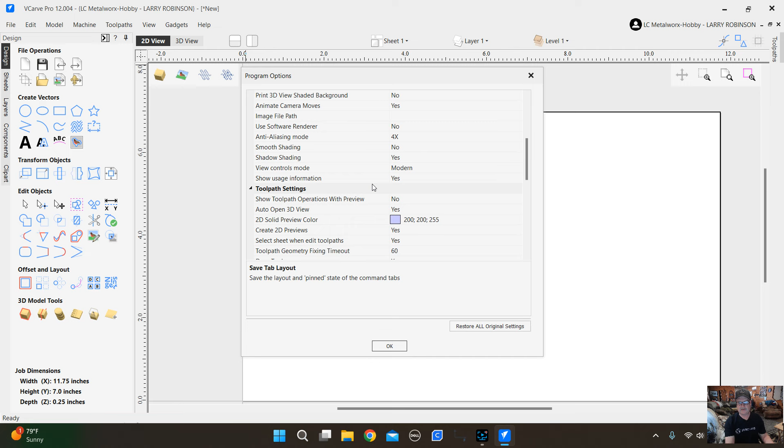All you have to do to fix that, I think you go up here to Edit, and you go to Options, and you have to go into these settings and click these general settings right here where it says 'show additional file operations'. You have to change that to yes. Right there, you click on that and see right here, you can push no or yes.

So that's all you do to get some of this stuff fixed. If something here don't look like you want it to, go into the options and look around in there.

But anyway, if I wanted to center this in here, all I need to do now is push this align button. See, under the transform objects, you can move things, set the size, rotate, mirror things, all that. But right over here it says align objects. Click that, and up here it's align to material. Hit the one that's in the center, right there. See there? So now that's perfectly centered.

What I was just going to show you is if this was an even number, you could do that when you put that in there. You could tell it exactly where you want it to be. But it's easy to align things like that also. And so to me that's not big enough, and we could have done that. So let's go undo. We don't really have to undo it. We can set the size right here if we want. So there's a lot of different ways to do things.

So as long as this says link XY, that's going to keep the proportions of everything. A lot of people want to hit the shift and drag things. I don't really like dragging stuff because once you do that, you can get things a little bit out of place, or you can deform it. But you can rotate, you can drag things. You do it if that's the way you want to do it. But I like to keep this linked if you want it to stay the shape it is. But you can change either one of these numbers.

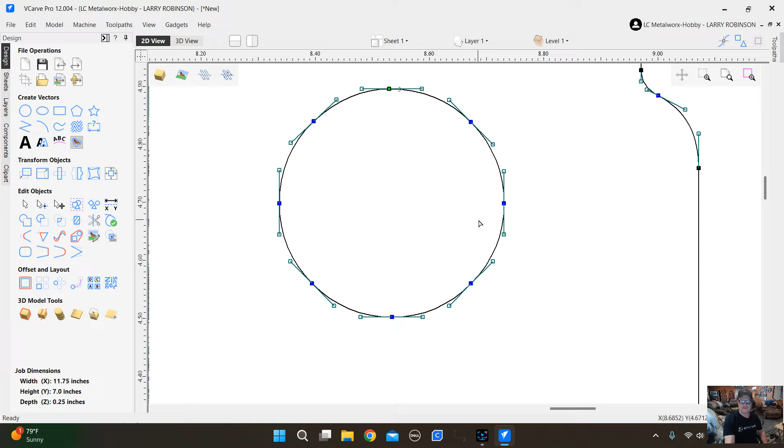Okay, and these are handles here. These are not separate nodes, so even the circle looks pretty decent. So I'll push the N again to get rid of that. And so now if you were worried about this, a lot of times people will group that, and right here it says ungroup and that says group. So you can group it and now it's back to all one piece. I don't normally do that, honestly, but you can. And it doesn't really hurt anything, I guess.

All right, now let's put something around this. So let's just get a rectangle. Right up here is where you can draw a rectangle. And you can tell it if you want that to be square corners or radius external or radius internal. I think we need a little of both. So let's do a radius external. And see, this is 11 inches. We want to use most of our wood. So let's go ahead and make it 11 inches. And if we want to radius the external just a little bit, let's put about a 1/4 inch.

I'll tell you what, this thing is lagging and it wasn't doing this to me earlier. I think it's because I'm doing the screen recording.

Let's go ahead and do a 1/4 radius on the corners. And we were going to make this, what did I say, 11 inches maybe? And the height of it, let's use up most of the height too. Let's go 6 inches. That'll give us a little bit of room there. Create that. Now notice I wasn't paying attention to my numbers. These were set for what I used last. So just push Control Z and that will undo your last move. And you can either put these numbers in here or just click this lower left corner and click, it'll snap right to that.

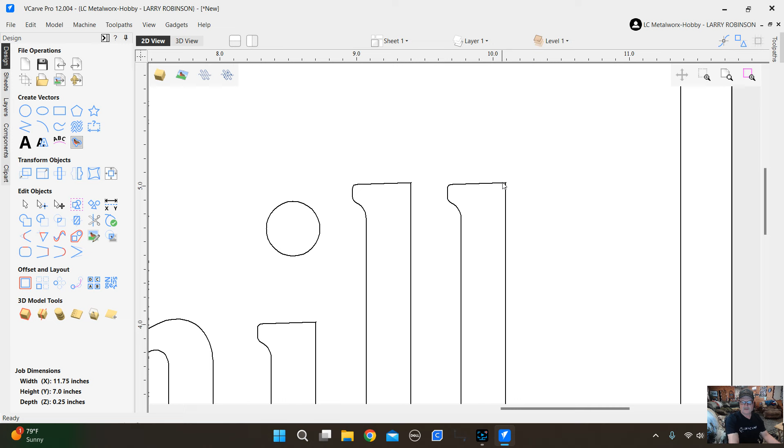And if you'll get close to that, you'll notice it has a check mark show up, and that's going to be an external radius just like that, and you can go around and click them all. Now if we'd have drawn this with that setting in there, it would have already been there when we made the rectangle. So you could do it either way if you forget, like I did. And you can also play with your different fonts and things too if you wanted to shape them different. Okay, we've got that to be a little bit of a radius. Now let's do another one on the inside of here. This is just where we're going to cut the whole piece out of that wood.

Now let's do one on the inside of it, and let's make it... I forgot how wide we made the letters, 8 inches I think. So by the way, if you forget how big you made something, you can come up here and put guides. See how you just pull them out of the sides? You can kind of line them up if you wanted. Right click them, delete them, whatever.

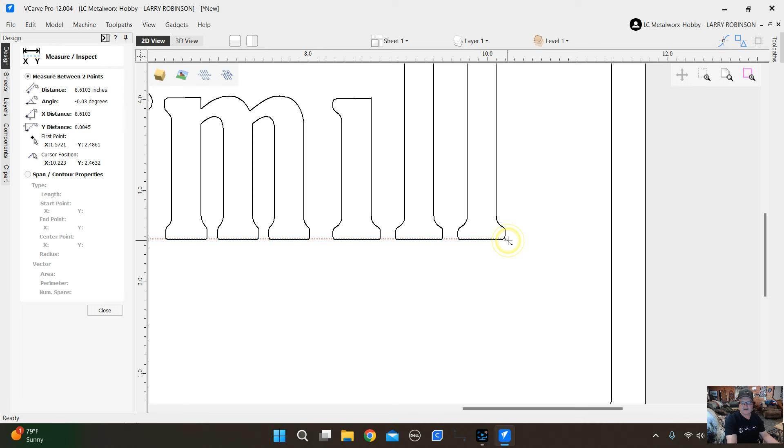Or just come up here to your measuring tool. See this? It says measure. So just find out about where you want to measure from and see how it snaps to that. Just click once on the left button and then move it there. And if you'll notice over here it says that's 8.6 inches wide. And how tall is it? Let's just see. It's about 2.5 inches tall. So we got about 8.5 inches or so.

So let's just make another box in here, a rectangle that is about, I don't know, let's just call it 9 inches wide. And I forgot what height those were, 3. Let's go about 4 inches, 4.5 tall. See what that looks like. Again, we're on X and Y 0, so it's going to draw it from here. But really, we want it to be from center, so let's click this center. And I think it messed me up again.

If you'll notice, you can find the center of this. It'll click to it, but because we have letters in here, it's possible that can mess that up. So there's a lot of different ways. I think the easiest way is just draw it like this, just to make it easy on us, and go back here into this alignment tool, since we're selected there, and just say align this to the material. And so see, that looks like it's a little too close to that. And I know there's better ways to go about this.

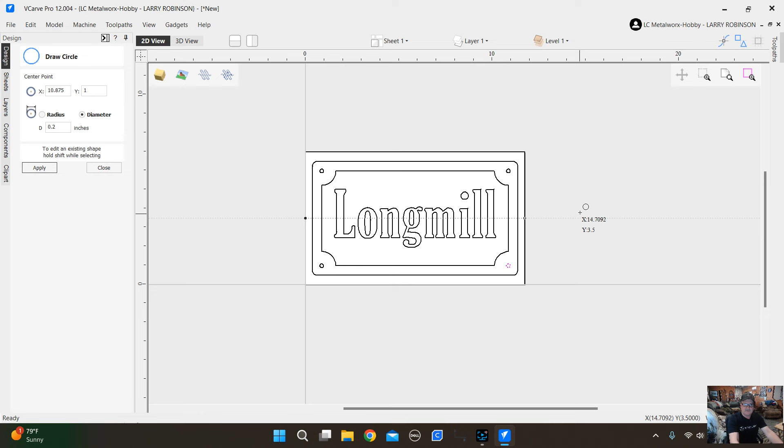And you should be able to snap these. See how that dot just kind of snaps to a position? Well, that's because it's reading the radius there and it's finding that distance. And that looks about right. So it's snapping right to that. And we need some more out here. But I don't think we're going to be able to snap these.

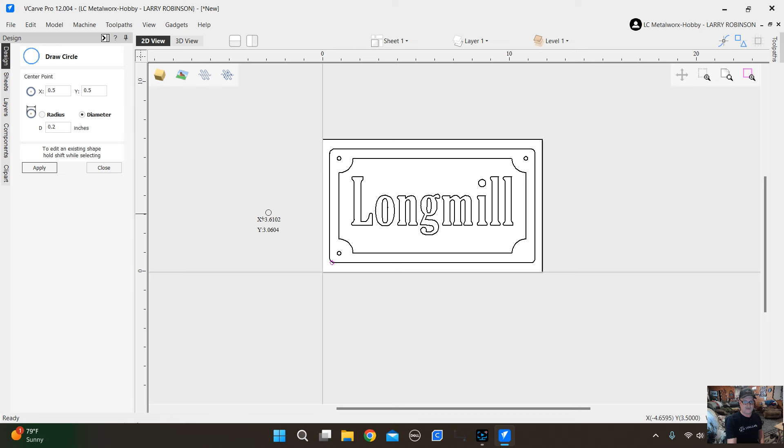So we got to figure out where we want these holes. So let's just see what it looks like if we came in. This is where you're going to maybe do a little math. Let's just check at 1/2 of an inch in and see what that looks like. So 0.5 inches. Let's see if we like where that is. And no, it's too far in, see? So that's not good. I'm just trying to find a way to hold this board down when we cut it.

Control Z, we'll get rid of that. Let's change that number to, let's go 0.3 inches, and see what that looks like.

So that's going to be, yeah, I'm lagging again. I don't know. I guess it's just, I heard someone else complaining about that. I must have too much going on here. This is a pretty powerful computer, so I don't know why it's doing it.

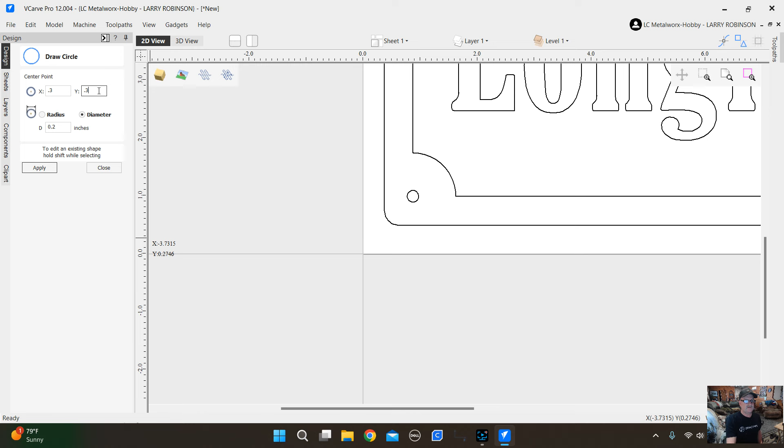So 0.3, let's apply that. That's okay. So let's do them all like that. And so this position up here is 7 inches, so we need to make the Y 6.7 and apply that one. And I got rid of the one we had by doing that. I had to burn it.

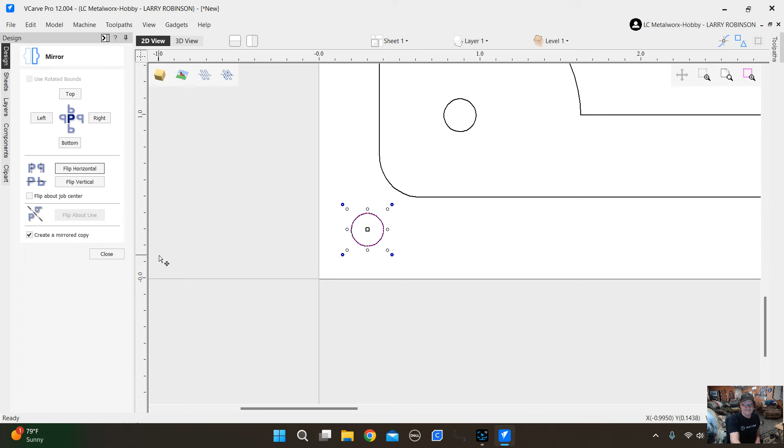I think there's a way to mirror this. I haven't really had much experience with that, but if you was to mirror something, you can create a mirrored copy and then flip horizontal. See what that does. It didn't do anything. It just put another one in there. Okay, well, I've made an extra copy of that circle there, so I got to get rid of it. We got 2 stacked on top of each other. So that's another tool we can use. No it didn't, that's the other ones we put.

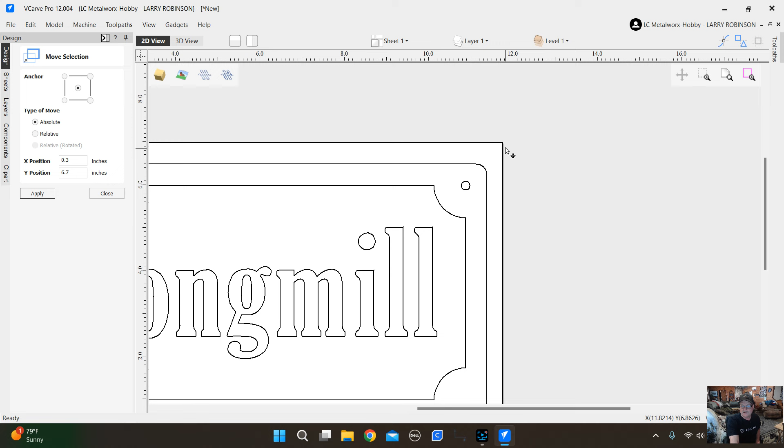So we want to move that, so see over here where it says move. Let's move that one. We already figured that was 6.7 inches in the Y position. And let's apply that. And so I don't know what this distance here, I'm looking at the bottom, it shows you where you're at. So this is 11.75, so I think you can do math in this if you want. And we went 0.3 inches there, so if we went on the X and did, well, it's lagging on me again.

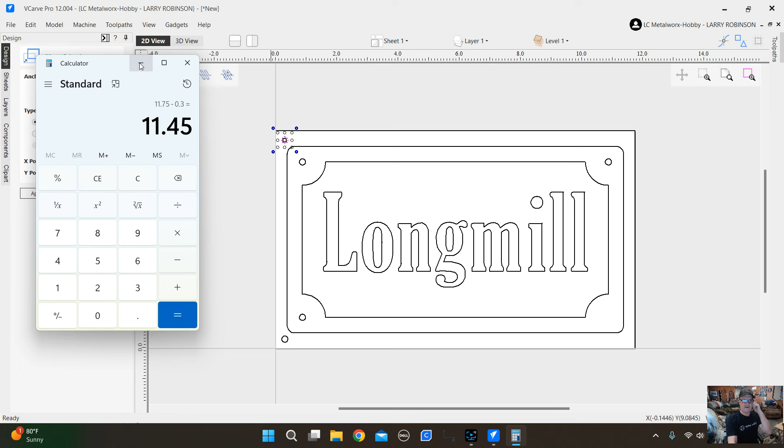Let's do 11.75 minus 0.3 and hit enter. And that didn't do it. Let's Control Z. So apparently, I don't know what I'm doing on that. So, I guess I have to do the math. So that's easy enough. Come down here to calculator and just go 11.75 minus 0.3 equals 11.45 is what we want that to be in the X. So 11.45.

Oh, I'm in a move function. That's why it's doing that. We need to be on circle. Now, when you put this at 11.45 and apply that, something is weird here. It's still moving my stuff.

You ever notice when you make a video, it makes you look like a real idiot, so.

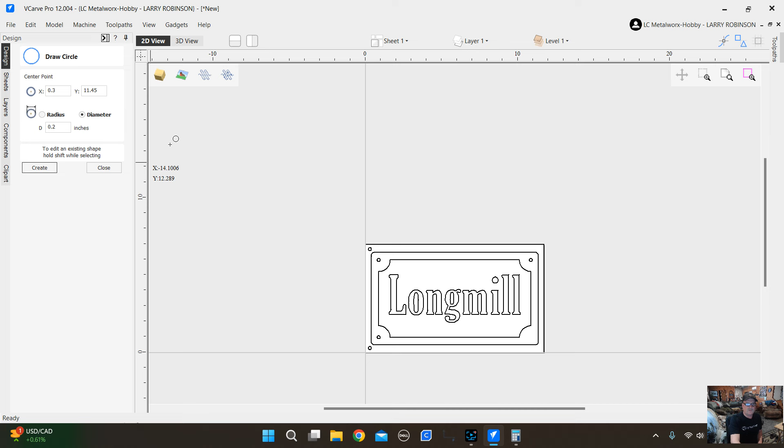You know what? It put it way up here for some reason. I've got this. Oh, I'm in Y and I need to be in X. The X needs to be, what I do, 11.45.

You know, you can know exactly what you're doing, but you start making a video, you start looking stupid.

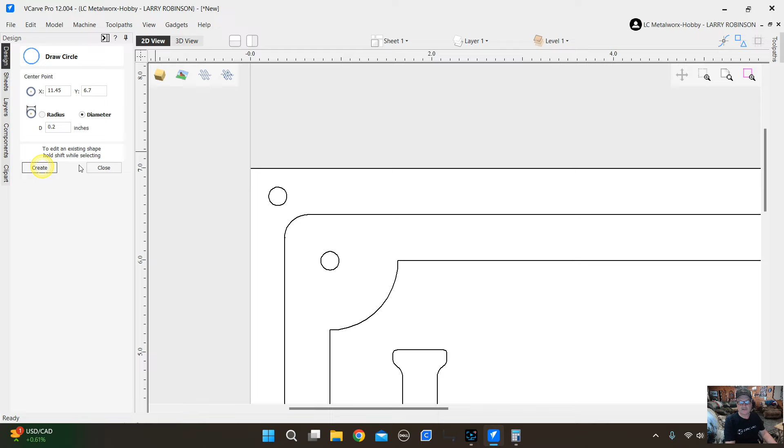You notice if you snap to this, it'll show you right where you were. So that's at 6.7 on the Y, and hit create. So see, there it is. And this one here, if we want to know what this was, it was at 0.3 on the Y. So we go 0.3, and the X should be the same as that other one was. So hit create, and there we go.

Just getting some holes, that way we could cut this out, and you're going to need to screw this board down to something with these holes. So when you first do this, just clamp it somewhere, preferably in about 4 places, but just for these drilling operations, you probably could get by with clamping it in 2, but you could clamp here, clamp it here, you know, on each end in there.

Once you get these in here, you can either have some inserts that you drill this hole pattern into your wood. So what you could do, and what I would probably do, is go ahead and—I don't know what size they need to be, but just for instance—push these circles.

Hold the shift key to select all of them. So let's just get all of these circles selected, holding the shift key, clicking each one. And while we're doing this... oh, I didn't even have one there.

I never did get one. How did that happen? We got rid of that somehow. I didn't even notice it. You probably noticed it while you were watching me.

So let's get this circle back in here and snap it back into place. All right, now again, that's—

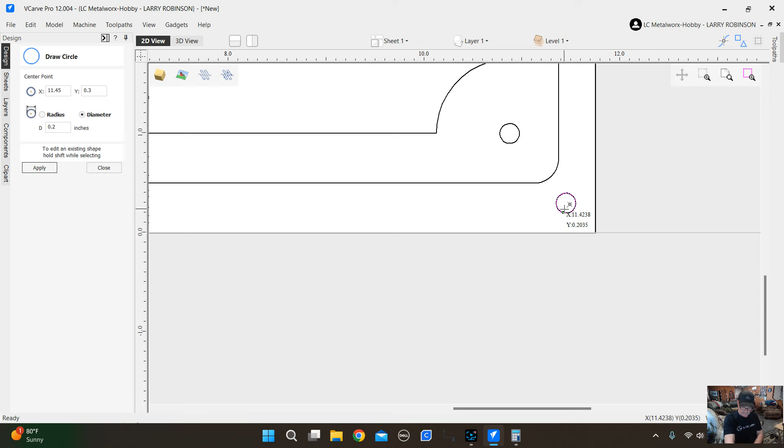Got an extra one there. I must have moved it. All right, you see when you click that, you can tell there's another one there. So apparently at some time I moved that one. Oh, there's one over here.

I'm doing all kinds of silly stuff today, trying to show this to you. I'm not even holding the shift key—I hit some other button, wasn't looking. Okay, I'm just selecting these.

I want to show you something you can do with all these. So now I've selected all of those. If you right click that, you can go ahead and group these. Now you could just click one of them and you're going to get them all. So that's probably the easiest way.

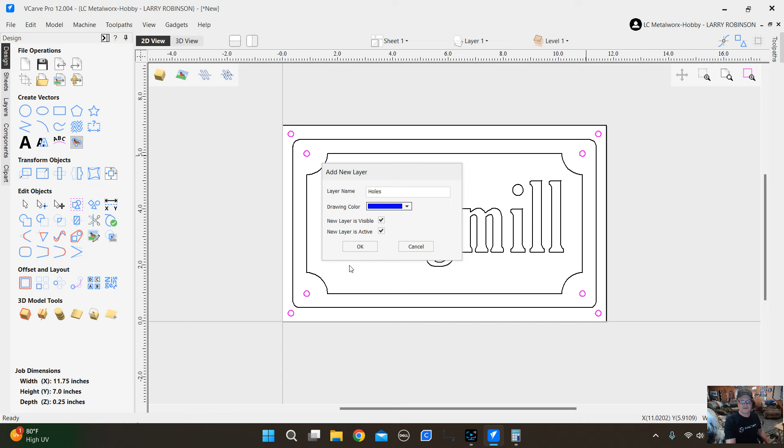What I was going to tell you: you can put these in a layer. Down here, right click on it and it says 'move to a layer.' You can push new layer and just say 'holes.' Change the color if you want to something like blue, and hit OK.

Looks like it's lagging again for me. So now you see that's there, and this layer will be right up here. You can turn these on or off like this too. If you want to turn off the rest, just hit that—that's how you do it. So that can become important later if you wanted to do that, but they're still grouped.

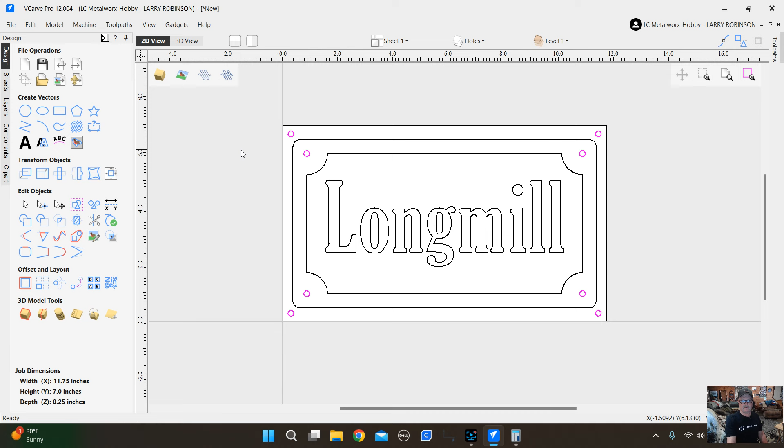So when you hit them, they turn pink. All right, so that'll give us a place to do that. All I was going to tell you earlier is you could take all of these and get back on it and say copy.

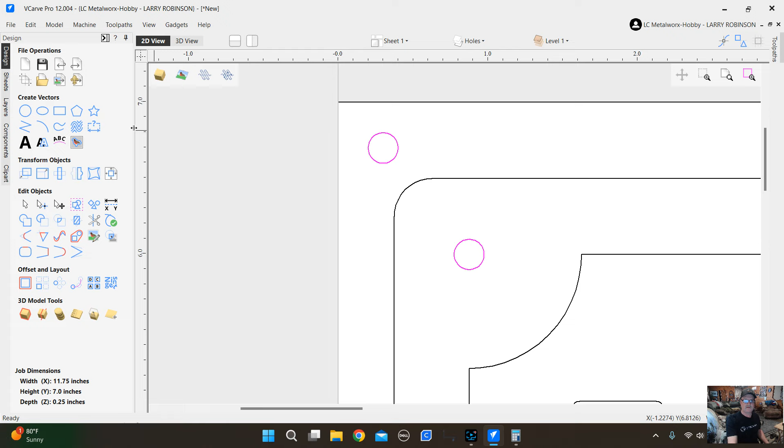Up here, just go copy. And then you can just push paste anywhere, and that puts another copy of them. So now you can just move them—I'm just hitting the cursor keys and we'll move this hole pattern over here.

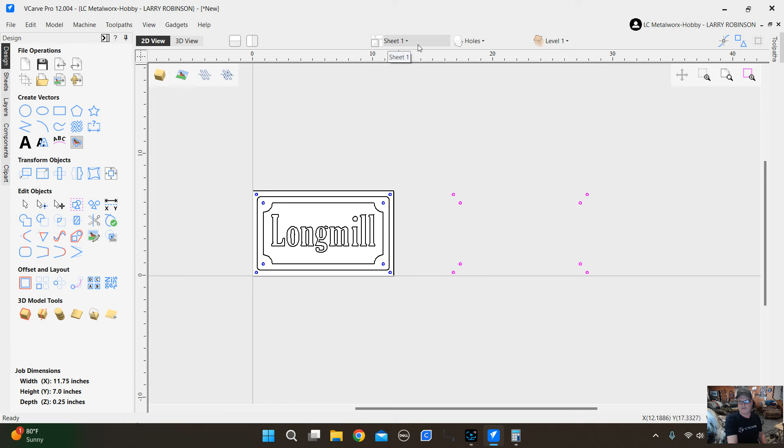Now if you wanted to, you could save this hole pattern somewhere on another sheet. You can do sheets. This isn't about getting that crazy on this video, but as far as that goes, let's just copy this like this.

Right now I could just go File, since that's the only thing selected. I could go File, Export, SVG, and save it—I'll just put 'hole pattern' or 'holes.' I can save it in here as an SVG, and use that later for a different thing. I could put it on another sheet too, but let's just save that.

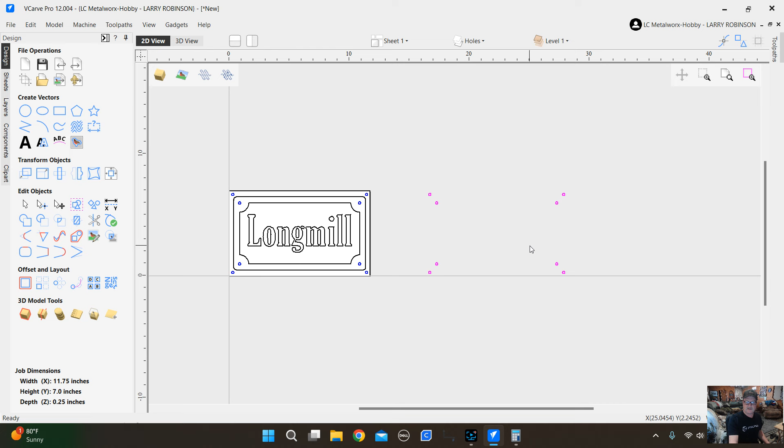And so now we have that saved. We can delete them off there—we don't really need them, since we've already saved them if we need them again. It's the same as this hole pattern.

You can do that anytime if you want to save some part of something, and you can actually add that to a sheet or something. You can add new sheets in here and name them, whatever—so that way you could have all this in one file, I guess, if you want to.

These are just to hold the wood down so when you cut it you can use tabs if you want. But to me, tabs are more of a nuisance, just adding more work to sanding and what have you. I like to bolt things down if possible. But we got to make sure we got room in here for an end mill to pass—if we don't, this ain't gonna work anyway.

So here we could measure this distance right here, and it's only 200 thousandths. So no, that's never gonna work.

So yeah, that's what you run into when you're drawing up things. It's just not going to work. So what we're going to have to do in that case is make this all smaller than it is.

So just select all of this, unselect these holes, I didn't mean them to be selected. Well, they're all grouped, so we don't want to mess with our hole size anyway.

So select all of this, go to resize right here. And as long as this is all linked, it's all going to shrink the same amount. So let's just bring all this down to 10 inches, and then bring that one to whatever the same amount is, and apply that.

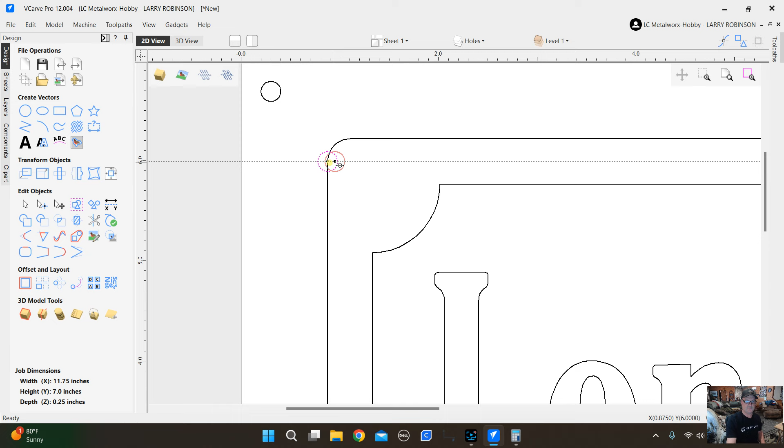Unclick that. Now I'm going to click that again, see where I can get a hold of it and move it. And now it'll snap to that. So you can do that. This is a waste of time, I know.

There you go. You can drag that and it'll snap right there to where you want it. Just trying to stay off of that line so we don't mess it up. But anyway, the second time you click it is when it'll let you move it. All right.

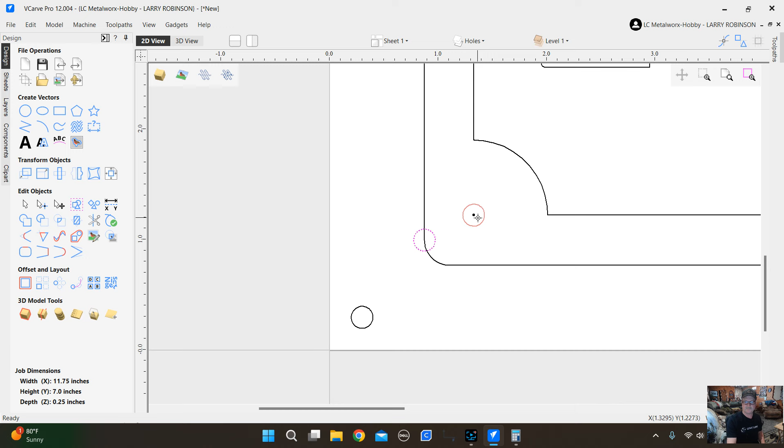And if we wanted to move these in a little bit now, let's see what our distance is now that we've resized that. So now we got 739 thousandths. That's a little less than 3/4 of an inch.

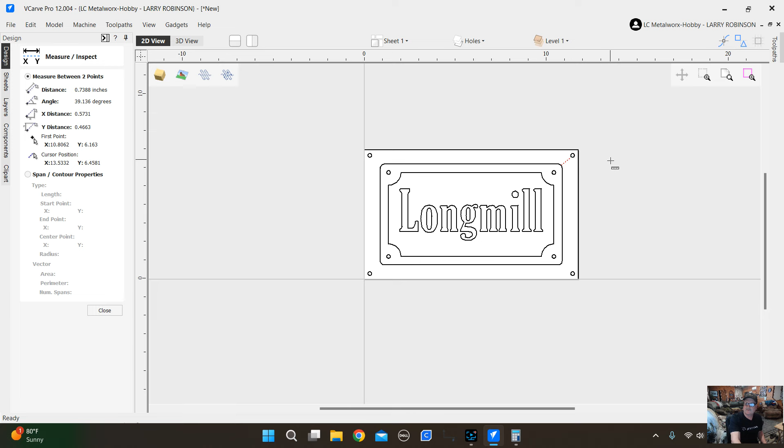So we can move this. So what you can do here is select all of those. You can change the size of that pattern. Right here it says scale selection or scale items individually. Individual would mean you'd change the diameter of the holes, but if you scale the selection, it's going to change the total size of this.

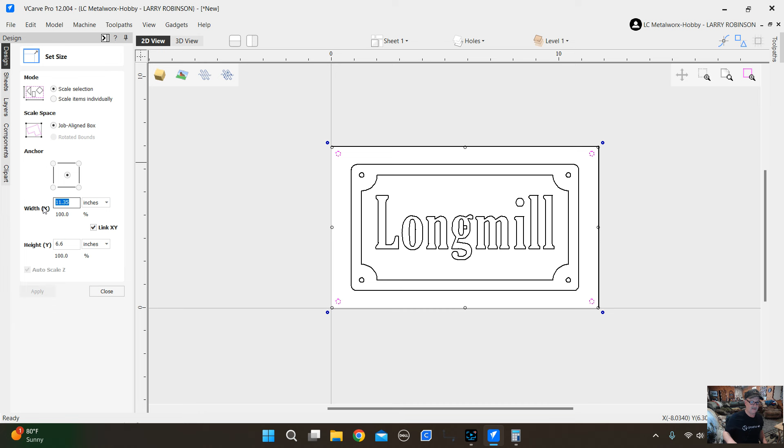So if we bring this in, I don't know how much, but let's just say bring that into a width of 11 inches. Because see, it's still linked, and go apply.

It just gets us into the wood a little bit better, so we're not so close to the edge, because this really is the edge of our wood here. And we want to leave a little room so we don't have to be super accurate necessarily when we line all this up. We just want to be fairly straight when we do it.

And now, of course, that messes up our layer, I think. So what I would do is just right click that and push delete this, and we don't need that. So we don't have that messed up.

Alright, so anyway, we've got a way to hold it down now, and we've got pretty much everything we need here to make this project.

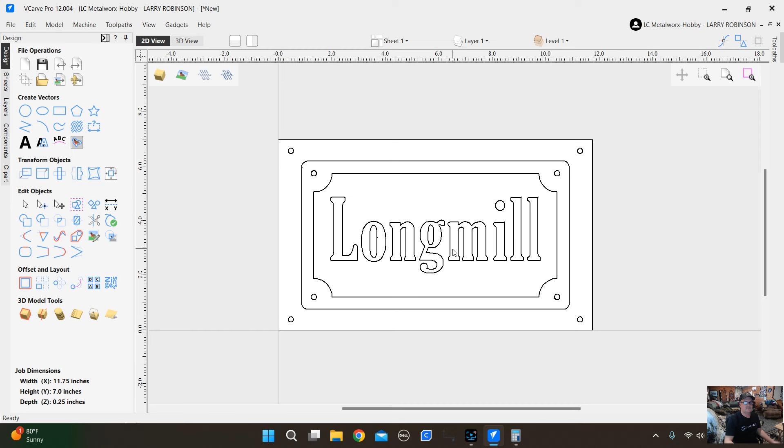So hopefully you understood how easy that is with all my fumbling around here drawing. It's not very easy to do when you're trying to show somebody. I mean, I know I mumble a lot and what have you, but it's really that easy. You just go through here and draw things.

Now the next thing, we need to make our toolpath. So right up here, see this arrow? You just push switch to toolpath, and now we'll go over here and we'll make our toolpath.

So whatever order you have them over here is what order the machine is going to run them, even though we're going to select that before we save the file. So first off, we're going to want to drill all these holes, right? So let's go around, I'm holding the shift key, let's select what we want here.

Okay, to do that, the best way is to not use a drill toolpath. You could if you were using the right size drill, but who has a 0.2 inch drill that's going to fit in their Makita router? Like nobody, right? If you had a spindle, yeah, you could have collets to do that.

It's one of the benefits to having a spindle. You can have more sizes you can do. But then you're turning your drill too fast, and it's just not that good.

Here's the best way to do holes. See this right here, Profile Toolpath. IDC Woodcraft, Garrett Fromm, he has a good video on how to do this in a lot more depth, but I'm just going to show you quickly. This is how you do it.

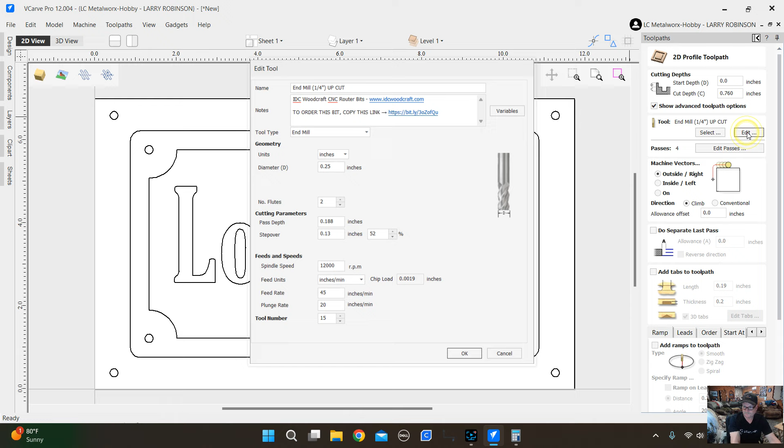So we're going to go the same depth here. Okay, we're going to use an end mill that's going to fit in a 0.2 hole, and it's not going to be a 1/4, so let's go over here. We don't want to edit that. We need to select what tool we want, so let's go over here and find a 1/8 end mill.

And upcuts are good. I've got a good long 1/8 upcut that I like to use. There it is. And I set these pretty conservative. I mean, really slow, especially starting out. Run this stuff slow. Most people, nearly everyone I see, runs it way too fast. Don't be in a hurry. This is a hobby and we want to enjoy it.

So this is a 1/8 end mill. I'm setting my pass depth, meaning how deep it'll go at once. For drilling a hole, I would rather not go very deep. Let's try 20 thousandths at a time. It's just going to add more passes to it. And we're going to go really slow on this. You can do it a lot faster than this. I'm just showing this to make it easy and slow and not so nerve-wracking. We'll leave it at 35 inches a minute and plunging it down at 10 inches per minute.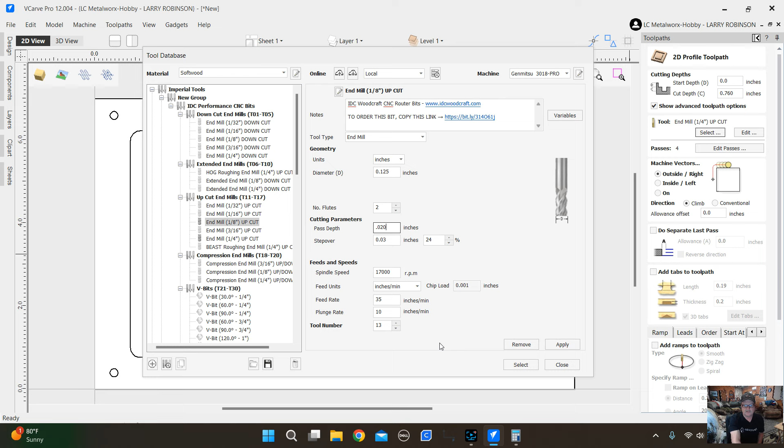And let's apply that, select that tool right there. Okay, so that's our tool we're using. Make sure you have this Show Advanced Toolpath options selected. It gives you more options in here. So we're starting that cut at 0 inches, which is at the top of the project there.

We're doing outside, that's wrong. We're going to be inside this hole. We're going to mill that hole out inside. Climb direction is normally correct. I don't like conventional cutting. Do separate pass, we don't really need to do that. What we do need is ramping. So add ramps, do this spiral ramping. So that's going to spiral right down into the hole.

If you'll notice somewhere, it's going to show you there's 38 passes. That's because we're taking such small cuts when I set that tool. You can change that and make it a lot faster, but we're not in a hurry.

Now we have to select, and we can name this. I would just name this Holes Long Mill - I got to name it something different. Holes Long, let's just try that. I have a lot of programs in here, so I don't want to have something with the same name as something else. Holes Long, we've got to select this.

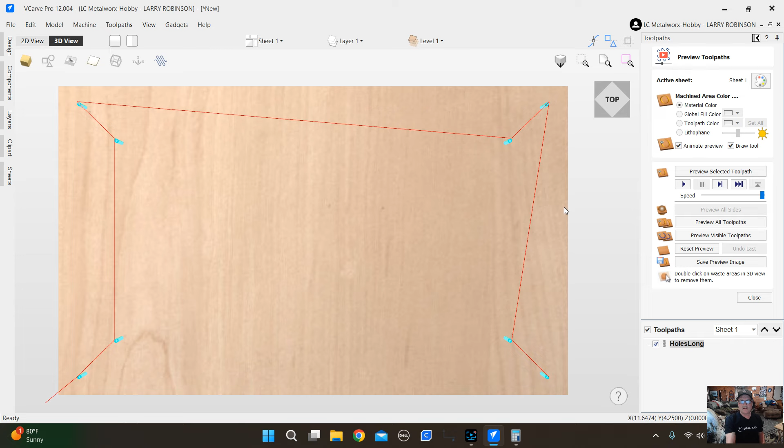Now we want to push calculate. So there's our toolpath, and you can hold this to move it, swivel it around, or use your right button. You can see how that'll swivel around the holes. See how they're doing? It's a spiral cut going all the way through the material. If you'll notice, it goes all the way through it.

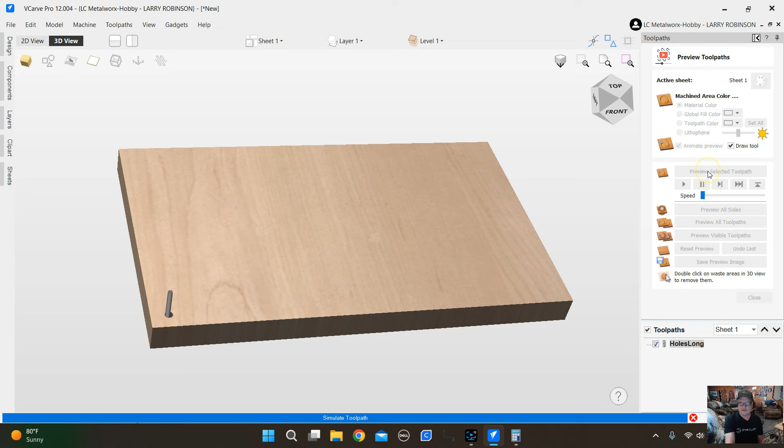You scroll your mouse wheel, it's kind of squirrely doing this. Sometimes it's easier to grab that and do this. But that's what it's going to look like. You can preview that right here by saying preview selected. You can slow the speed down here and preview that, and watch it do those holes. It does it pretty quick on here - can't hardly slow holes down like that.

So if you push top, you can see this is what we're doing here. And there's our holes - they went all the way through.

All right, are you following this pretty easily? I know I'm long-winded, and I hope it's not a waste of your time to watch this. If you've never done this, I'm hoping it'll show you easy ways of doing it.

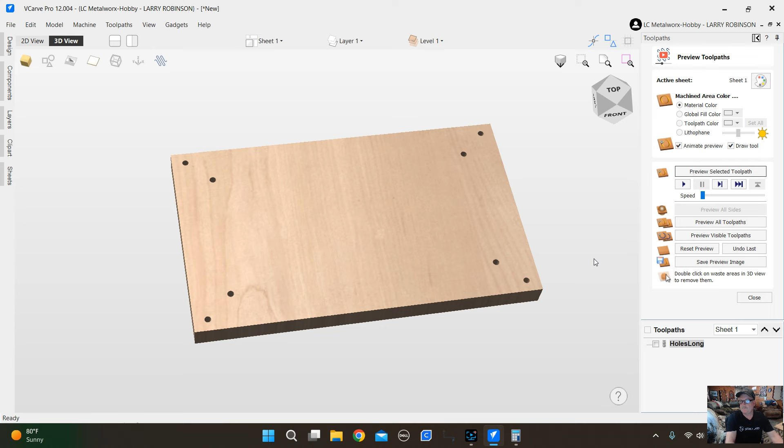So we'll close this now, and this just opens. We're in the Toolpaths, now we're in a 3D view, and if we want to go back we don't have to. We can use either the 2D view, and you can turn Toolpaths on like this. I don't see - oh, they have to be selected here, and you'll see your toolpath right there.

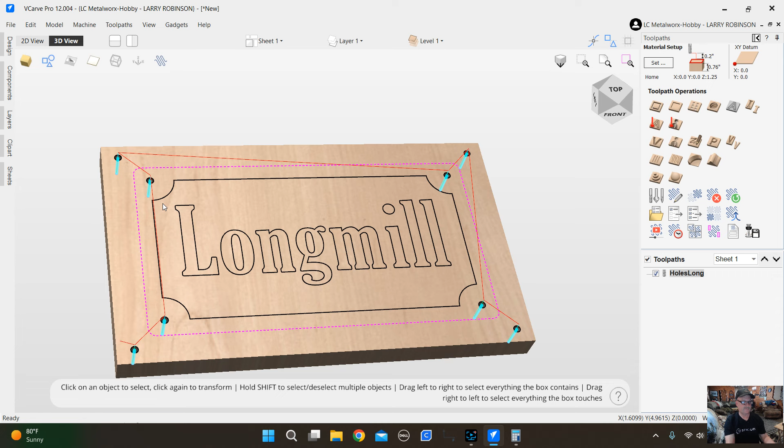You can turn that off either way, but most of the time I stay in the other mode. This is a new thing in this version 12, where you can work in 3D mode here if you want. So let's just do it for now, maybe we can see better, I don't know. All right, so what's the next thing we want to do? Let's turn the toolpaths off so we don't have to look at that.

So now we can screw this wood down. Honestly, you need to screw it down in all of these holes eventually. You might as well go ahead and screw all 4 holes down, because you're going to cut this out and you want this to be still when you do it. If you trust it, you can put some clamps, but you don't have a lot of room to work. But I would definitely screw the center part down.

Well, not yet - actually this is what we do. We screw the 4 holes on the outside down now, because the next thing we need to do, let's select these 2 lines and let's pocket out this area right here. But if you want to save tool changes...

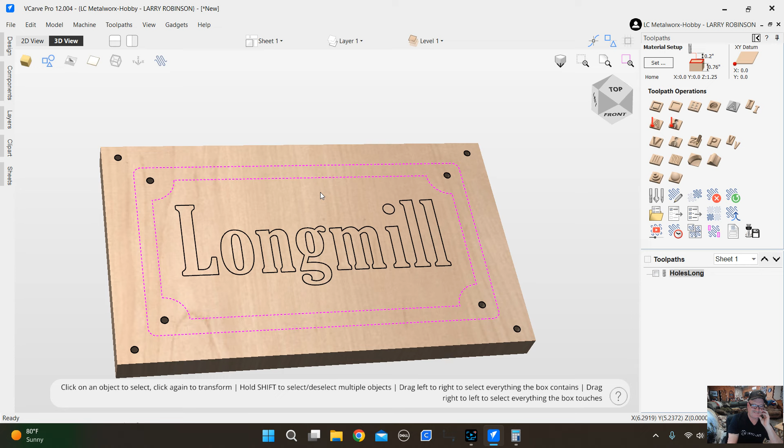Actually, probably would do these letters next. So once you get this screwed down solid where it's not going to move for sure, go ahead and select your letters like this. Now go to right here where it says V-Carve Engraving Toolpath.

And I've got a V-bit selected that is 90 degree. And it's a 2/3 inch, so it's a little bit bigger than the 1/4 inch, and it works a lot better, I think. It has an insert on it, and it just works good. I found them on Amazon. I also have the IDC 1/4 inch, and it's okay, but this bigger one is so much better because you can go deeper with it, and it just works better.

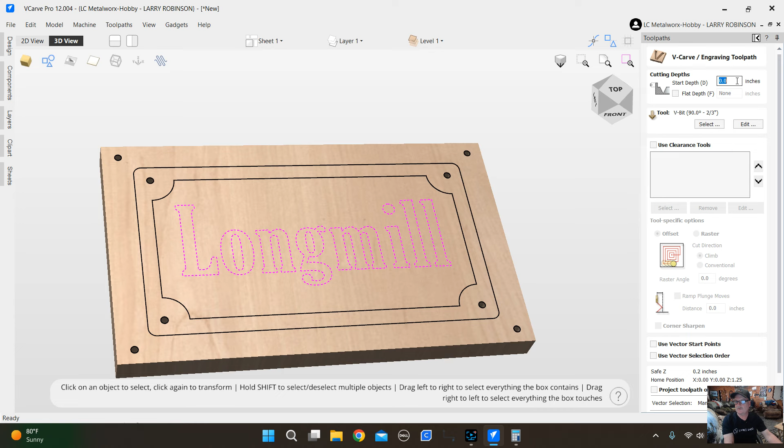So we're going to use 0 as our start depth. We're not going to do a flat depth, I don't think, because I don't think these letters are all that wide, and I don't think we need a clearance tool. Clearance tool would be as if you wanted to, you know, the way we could figure this out right quick is go over here and measure how wide these letters are exactly.

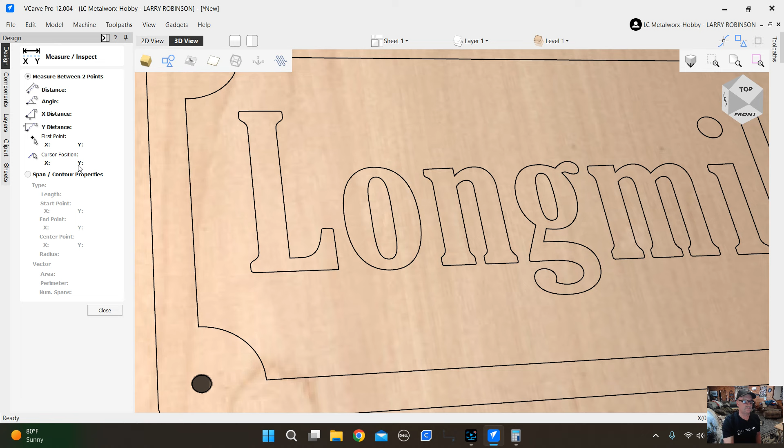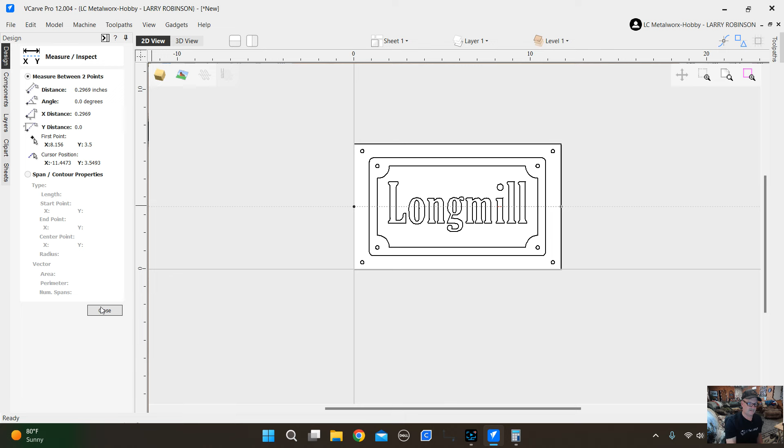Well, I don't know. I think it's lagging on me again. Maybe it needs to be in 2D to do this. Let's see, how wide are the letters exactly? Yeah, they're about a 1/2 inch wide. So, we may need a clearing tool. I did this earlier on a smaller piece of wood, so that one's 296, so I think it would be best to use a clearing tool on this. Okay, that's how you figure this out.

So let's go back over here, and let's go ahead and select our letters again. Sorry this is so long, I'm just figuring it out as I go, showing you how you can. Let's go ahead and use clearance tools, and to do that, let's select, I really like using that 1/8 upcut that I have. It works really good. It's a long one. If you want to know which one it is, holler sometime, I'll show you the link. It's just Amazon. It's a longer one.

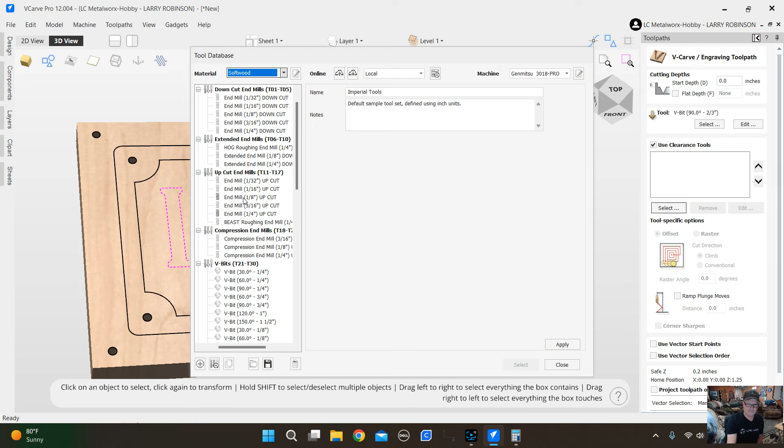I have a ton of different end mills. This is just one of them. I have 2 of these actually. And it doesn't matter if you select exactly the right tool, because all we need to know is the diameter is 1/8 of an inch, and it's a flat cut end mill. And just tell it what pass depth you want.

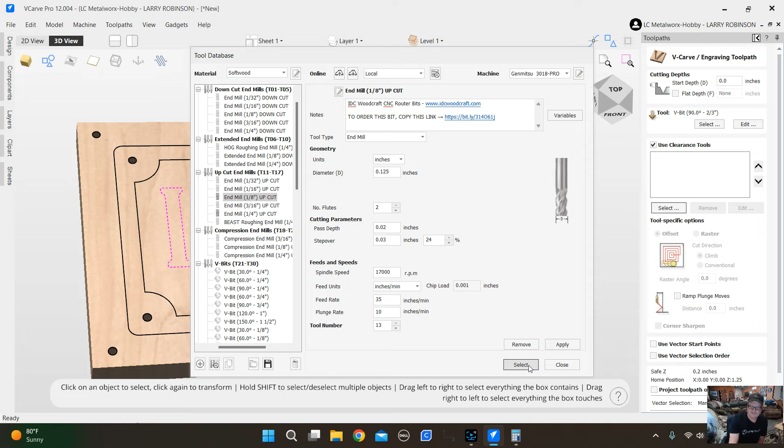That's only set at 20 thousandths, and I'm not real worried if it takes a while to do this, honestly. I'd rather get a good cut out of it. But you're just clearing that out of the way, so I'm not going to worry about any of this. It's set really slow, and that's good. So let's just select that one. And so there it is.

Now, we're going to use that V-bit tool and that clearance tool. And we're going to do an offset, which means it's going to not sit here and go zzz. You could pick that, but I think the offset will work fine. It's just going to go around and figure out the best way to clear that. Climb mill. I probably would go ahead and do the ramp plunge.

The general way of thinking on a ramp move, that's just so that when your end mill comes down into the work, it don't just dive straight into it and start working. It kind of angles into it at a ramp move, and then it starts working. So normally about twice the diameter or more is about what you want. So this is a 0.13 diameter, 1/8 of an inch is a 0.125. So you want at least 0.25. Let's go a 1/2 inch.

That'll give it a good smooth plunge, and it's going to take a little longer, but we're not in a hurry, remember. If you're getting in a hurry, then you can change these, and you can take a chance on breaking stuff if you want. It don't matter to me. Break all you want. I don't ever break tools because I take my time. I've never broken an end mill on the LongMill, I'll tell you that much.

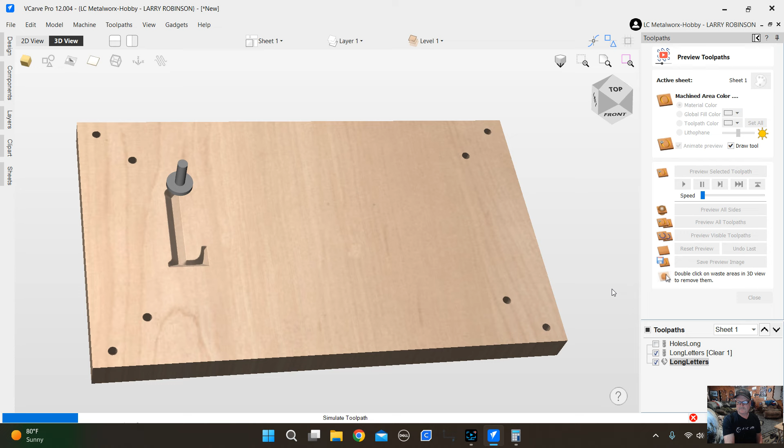Okay. To stop that, just go right here. Let's reset our preview. We need to take this and drag that one above the other. Actually, the clearance is above that one, so not sure why it went that direction. Let's try that again and see what it does. There's our clearance tool. I must have only selected that other one.

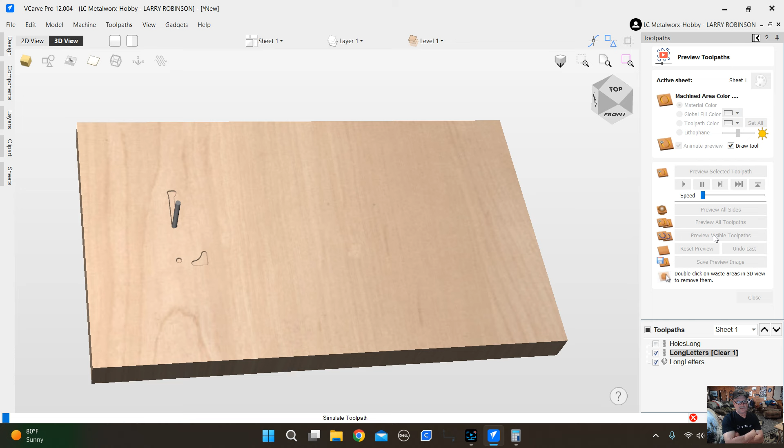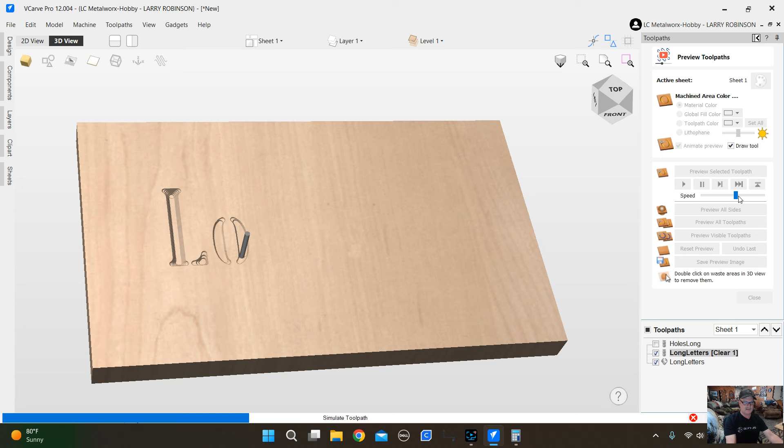So see how that end mill is going in there, removing a lot of that material, just kind of roughing that out, and it's going to take a little bit of time. So let's speed this up, because it's going a little at a time, and you can turn that up quite a bit. I was being real conservative with that. I don't want you to break an end mill right off the bat, so you can figure out what speeds. If you want to take a little more step over and a little more feed rates, you can.

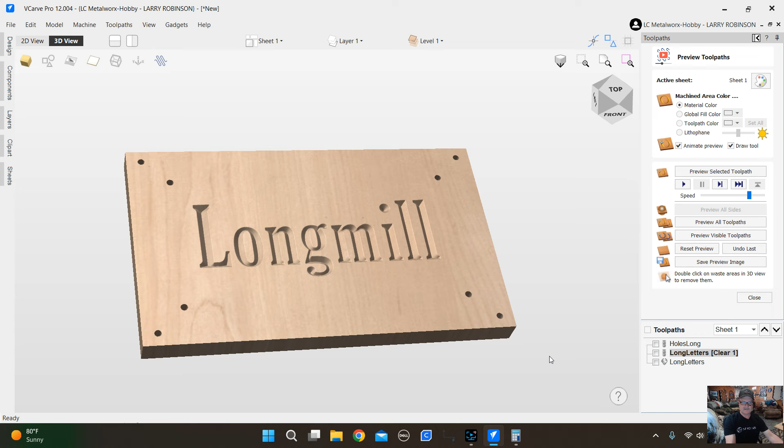But anyway, this is kind of clearing that, and then it's going to come in with the V-carve right there, and that's what it's going to do. So there's our letters. We got our holes, that I guess I need to preview that one again since I reset everything. So there's where we're at so far. Close this. And so now we need to do this pocketing, and then we'll cut it out.

So let's just select these two lines, and let's do a pocket on that. So right there, see where it says pocket toolpath. Let's just do a 1/4 inch end mill in there. No big deal. Let's go to half the distance of the depth of this, is about 0.375, or actually about 0.38 would be right at half the distance. I don't know what we want. You can do it whatever thickness you want.

So what else? Same thing. Let's go climb. It's showing one pass. We don't like that. Let's go look at this tool and see how it's set. See, that pass depth is showing. I don't want to do that. Let's go about 0.125 on the depth. Half the diameter is about normal for your depth and your step over. And we got about 0.100 on our step over. That's good.

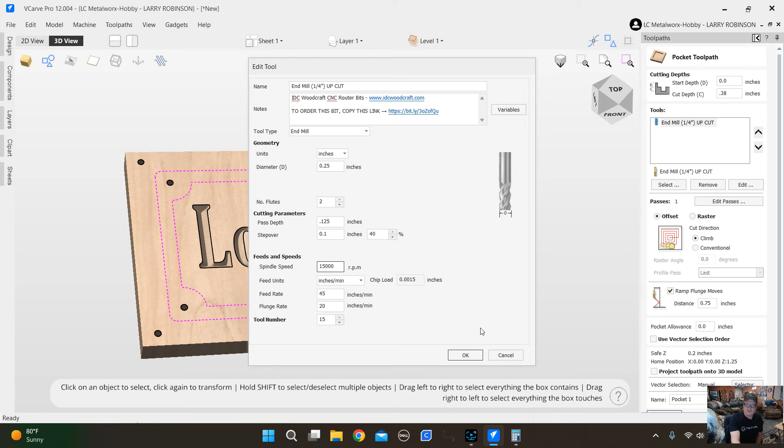45 on the feed rate and 20 on the plunge. 12,000 RPMs. We could probably kick that up to 15,000. You can see your chip load should probably be at least 1.5 to 2 thousandths at minimum. So that's not much of a cut. So let's go okay on that. Now that's showing 3 passes. Climb, ramp move is showing 3/4 of an inch. That's fine.

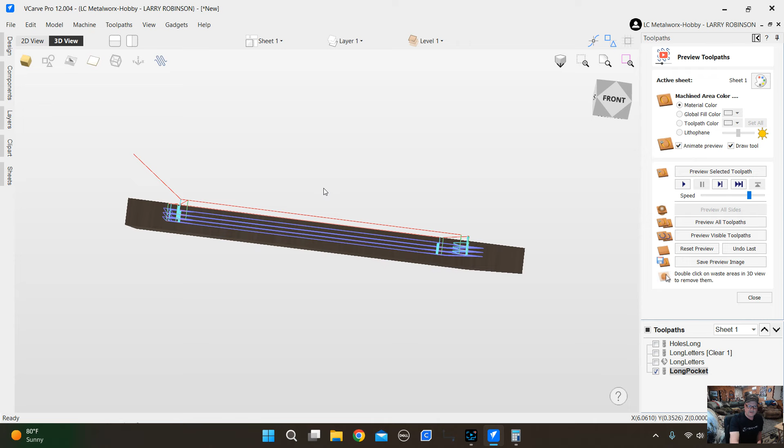Let's just name this long pocket. And let's calculate it. So that's kind of what it's going to look like. It's just going to go in there and make 3 passes around here and pocket all that out. And let's watch that happen. Slow it down. That's pretty cool. And see, watch that work. Preview. Oh, I messed that up. Let's stop that. I need to only select this. Preview visible toolpath. And here we go. Let me speed it up a little bit.

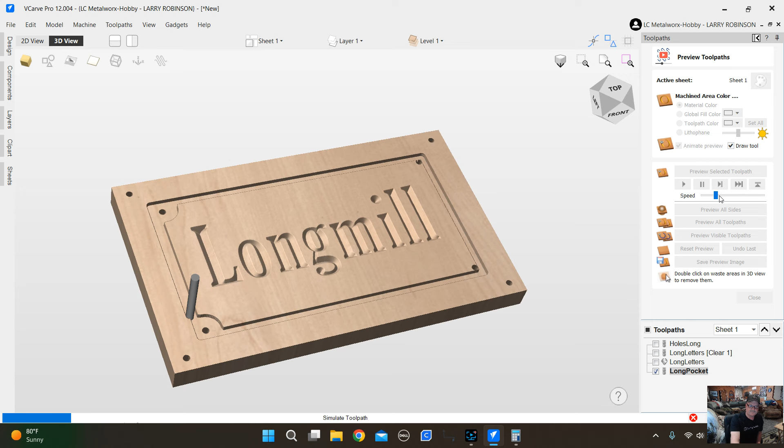So it's just finding those, we're clearing this out, and then it'll come back and do probably a little finish pass when it gets that knocked out of the way. There we go. Now it's doing kind of the final pass on the inside. And it'll come back and knock that piece out of the way. Kind of lagging there now. Hope it don't lock up. Oh, it's doing another pass. Let's speed this up.

So yeah, you can see at the end of each pass it goes in and kind of cleans up what it did. See, that's the cleanup. It did a reverse. No, it didn't. It was doing a climbing. It was on the other side. That's what it was. So that's about it right there. Keeps lagging right there. All right, so now all we have left is to cut this out, and that's done.

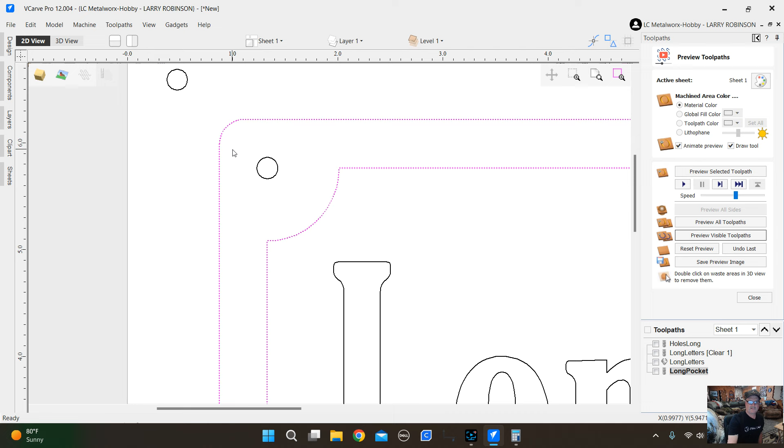And remember, at this point, since you pocketed this out, it would be best to go ahead and put screws in here so this don't get all loose and break an end mill or do something crazy. So at this point, I would go ahead and put screws in these 4 holes so that holds that down. And I believe we verified we have room in here. If we don't know that for sure, don't mess around until you've checked. To be sure, go over here to your measuring tool. Be sure you have room between here and right there. And it's 448 thousandths. There's plenty of room.

So let's go back over here and let's do that last one. So close this. We're going to select this line right here. That's where we want to cut it out. Do a profile toolpath on that. Select that 1/4 inch end mill, whatever you prefer.

Most people want to do a down cut. I'm not a big fan of that. It don't matter. This is MDF, so it just cuts easy and sands easy. It doesn't really matter which end mill you use. To me, upcuts get more dust out of the hole and your vacuum will move it easier, but that doesn't really matter. So here you go.

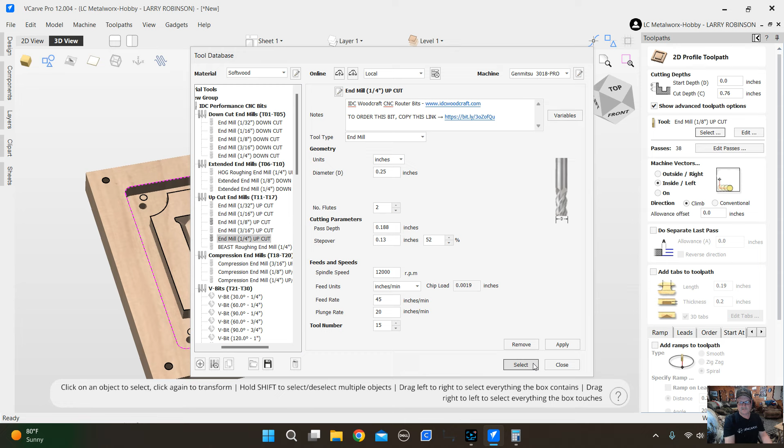Select that one. I keep selecting different ones. I may have even did a down cut earlier and didn't notice it. Where is IDC's upcuts? This ain't the one I use, but that'll work just fine. So select that one. And again, we're going at 0.76 inches on our depth. That'll get us all the way through the material.

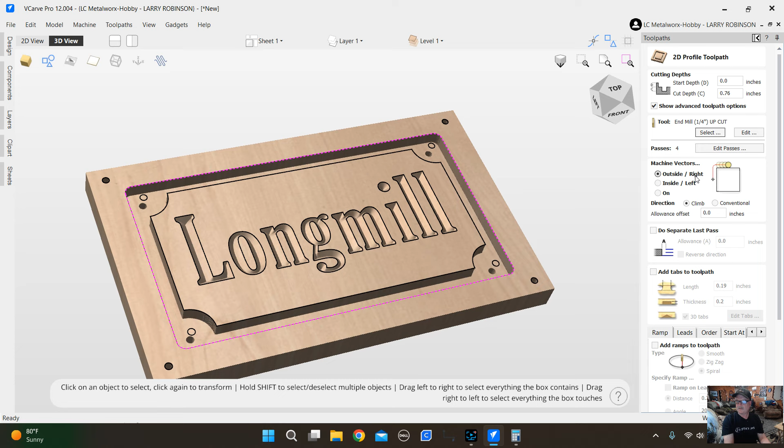We're going to go outside this time. Make sure you know which one you're selecting. We're going to be outside that line, so we leave all of that. And now we want to do a climb mill. We don't really need a separate pass. You could if you wanted to, just to clean it up or even to do an allowance.

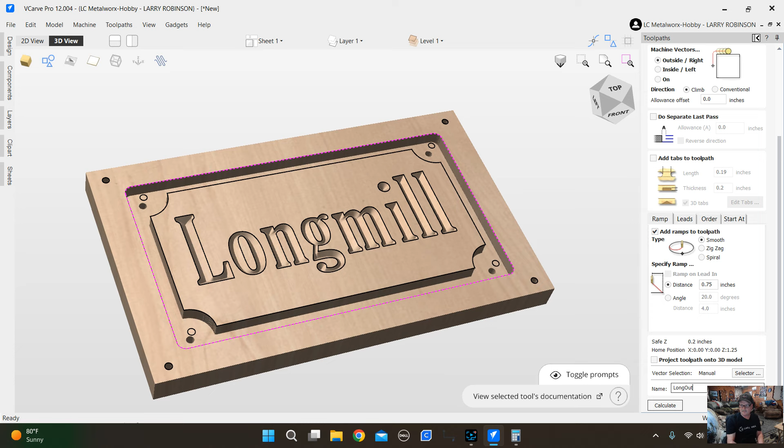I'd go ahead and do a ramp move on this. Not spiral though, we'll do a smooth ramp. Hope I picked that earlier. I think I did. 3/4, that'll give us a little room to ramp into that. Let's go ahead and name this LongOutside and calculate that. And that's about the same as we was doing earlier. It's just, what, 3 passes or so to cut that out.

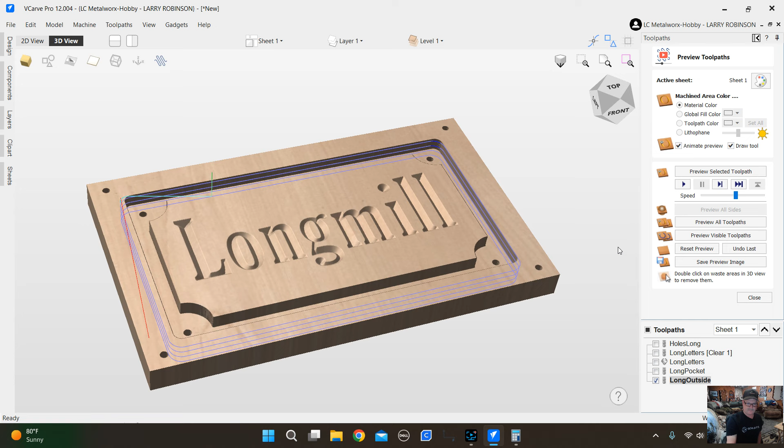And so we have screws on all of these holes, so it holds it all together and they don't go rattling around and break your end mill off, or scare the crap out of you, whichever. So let's preview that one. And here we go on that. It's just cutting it out. I think it was 3 passes, wasn't it? And so there it is. So now you can see it's all clear.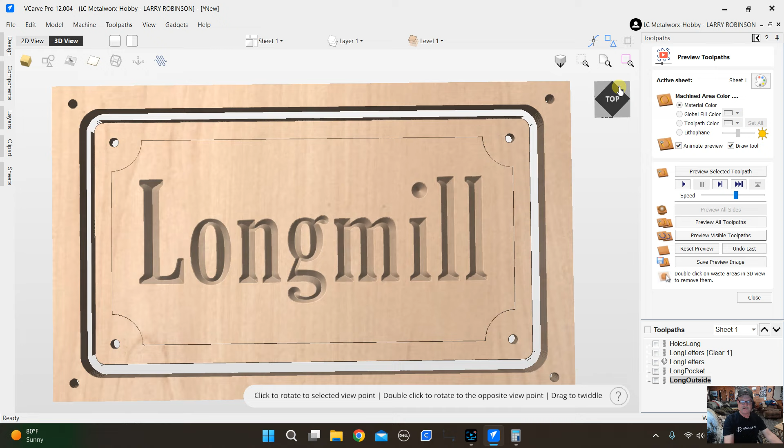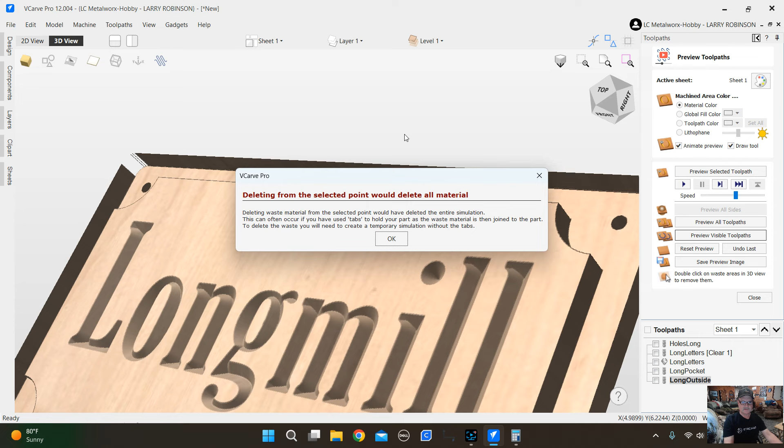You can double click this and it'll move that out of your way. Sometimes it leaves little shreds of stuff that if you turn it just right, you might can. Sometimes you can't get rid of it. Maybe we would have had to go a little deeper to clear that, but at any rate, that's how you do it. That's just a simple project I wanted to show you.

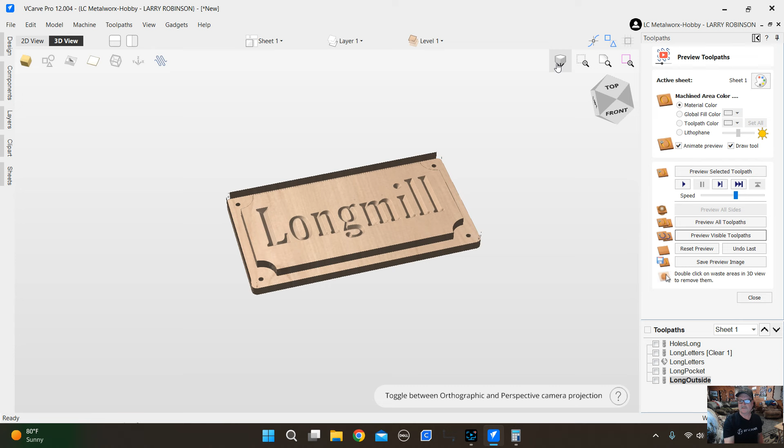If you're new to this and you're scared of the software, or maybe you just want to see someone else do it first. I'm that way myself. I like to watch someone else do it, and then I feel a little more comfortable about it after that. But that's just a simple thing you could make, or anything else. Just draw what you want to. You can bring in other things from other ways. I'm sure there's plenty of videos showing you if you want to import vectors. I have tons of files of stuff.

I was doing laser cutting the other day on some of this stuff, but I don't even see it. I thought I just imported something, but I didn't see it. Looked like it put something right there. I better undo that.

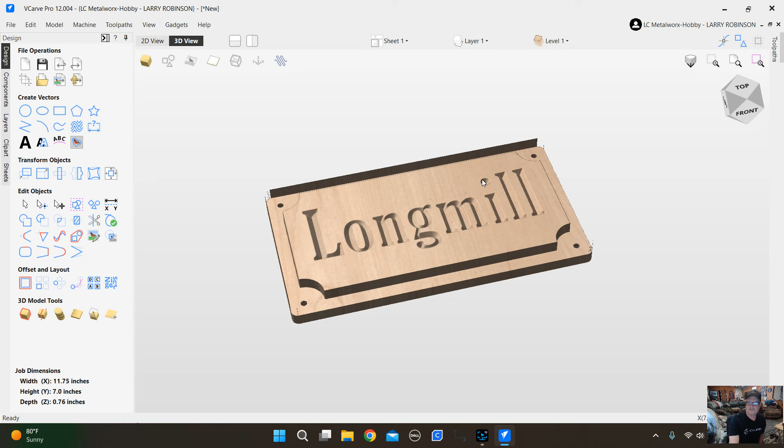All right, yeah, there's a lot more stuff you can do in this program, and there's even 3D things you can bring in. But I think this is kind of cool. Oh, before we leave, let's go back over here. You can definitely see how much more modern looking this is, more like Fusion 360 or something. It didn't used to look this way, which it doesn't matter. It works the same, but it's just kind of cool.

You can save your file right here, and you can do some keep out zones for clamping. And to me, that's just dumbing it down a little bit. You should know. Oh, I didn't get into saving this stuff, but this is the order we're going to do.

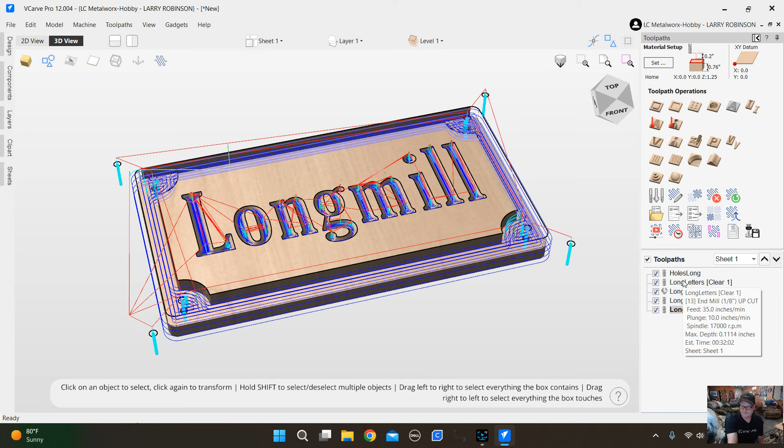So we're going to do the holes and all that, and to save this stuff, honestly, you only want to save things into a file with the same tool, and only if it's not going to interfere with another operation. So to save it, you just click, make sure this is clicked and it's highlighted. So holes, to do that, you would just, and we may go show this actually on the machine.

So you're going to go save toolpath. Make sure you have the right post processor selected. There's plenty of videos on how to do that. I can help you with that.

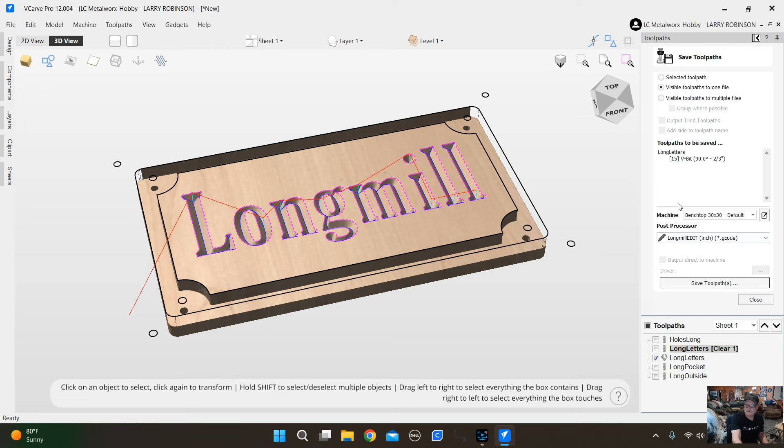That's the clearance. And then you can do this one, which is a V-carve. Same way, you're just going to go up here. Yeah, see, it's warning you, you're using different tools and it doesn't support tool changing. So unclick that one. Now we're going to do the letters and save that toolpath.

Okay. Then we're going to do the pocket after it's screwed down on the outside, but not on the inside. And so I can't remember if we could have done two of them together or not. What did we do last? The long letters. We cleared that, but we're going to pocket with a 1/4 inch. So no, we couldn't do that. So you still can't have screws in these holes, but they're screwed in out here. So let's save that toolpath.

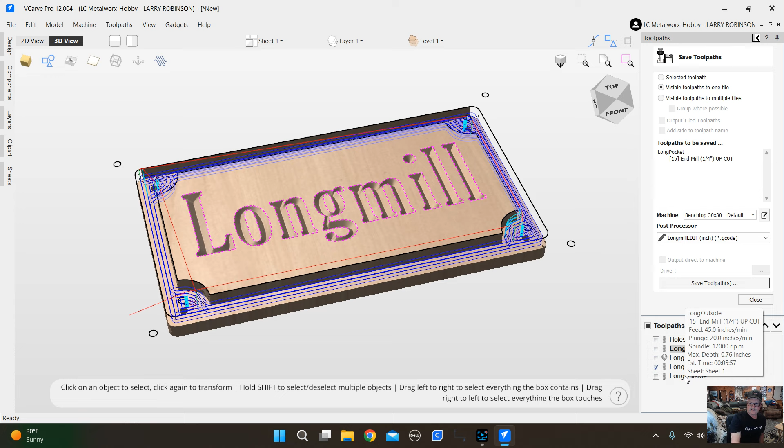And you can put numbers 1, 2, 3, 4, whatever order. It's the way you should really do it when you're running. Probably should put it in its own little folder when you're first starting, and name 1, 2, 3, 4 on your file name so that you know for sure which order to go by. Now we're going to do the outside cut, and that needs to be its own file. So there's a lot of tool changing and different files to run here, but it's okay. It's fun, isn't it? Messing with it.

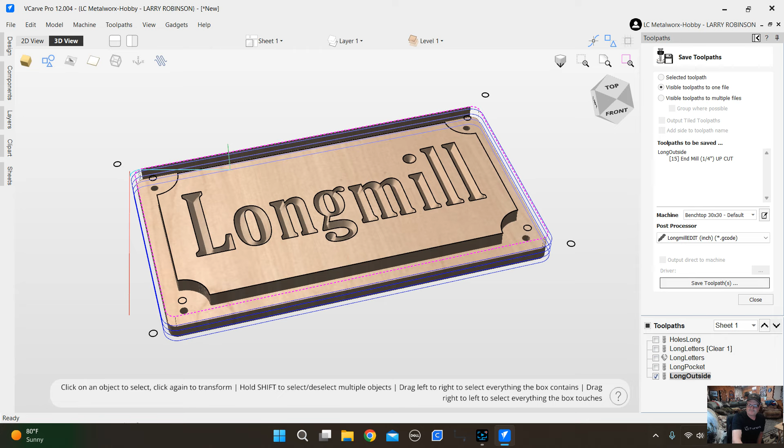And that's it. And now, the outside is going to be the easiest G-code to look at if you wanted to see what that looks like. You really need to understand what your G-code looks like, honestly. I can't stress how important that is. And this is the way it looks. The G0, G90, G54, G17, G20. That's a startup line, and you can add notes in here with parentheses that won't affect it at all, but that's just your startup code.

That gets the machine to where I know without any doubt it's in the right mode to do what I want it to do, and that's G20 is in inches, G17 is your XY plane, G54 is where we're running our XY0 offset. It's where we set our 0. G90 is absolute, and G0 is a rapid move, and that's just how you normally start. And you can put spaces in here if you want or whatever.

So anyway, we're going to rapid to 1 1/8 inch, no, 1 1/4 inch. We're going to go to 0. Spindle's coming on, which usually you turn the switch on to turn it on. And here's all the motions it makes. It's really easy. It's just going to rapid to these spots, and then it goes G1.

Brings the Z down to 0, which is the top of the material, at feed of 20. Then it's going to start ramping it into the work, and then start going around it. The ramp is the only thing that makes this a little more complicated to look at, because it's ramping the Z in slowly as it's moving into the cut, and then it's just going to go around it.

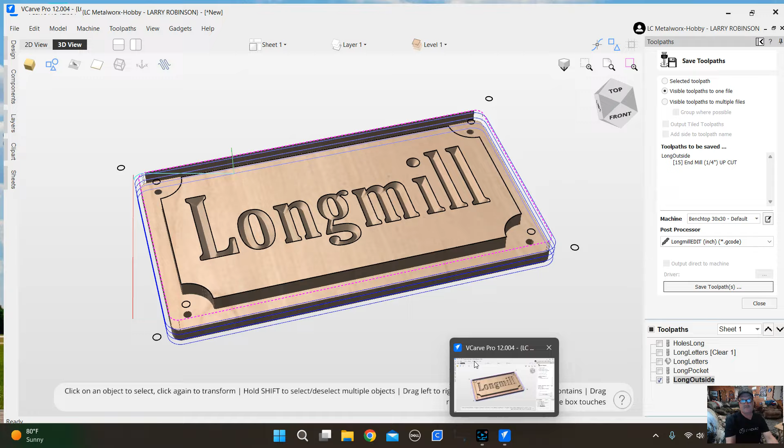So I just push File, Save right there, and it's in there. I save these on OneDrive, so I can pull these right there at the machine off of OneDrive. So anyway, that's kind of the first stage of how you do this stuff.

I know if you've done this for very long at all, you already know all this. This is not for you, this is for people that are just starting, who haven't ever even looked into how to do this. This gives you some example of something you can try to play with as your first project. And if you'd like to have this project and you have a Longmill, don't blame me if you tear something up. I'm just telling you, I can give this to you if you want it. I want you, though, to learn how to draw this for yourself, and that's how easy that is to do.

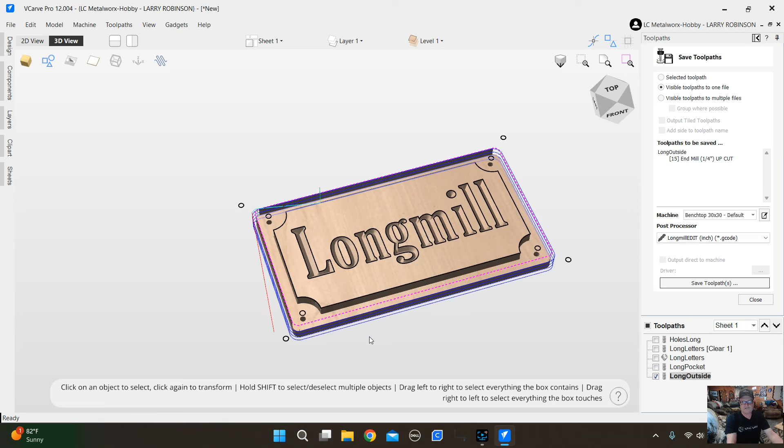So ask me questions. I'm gone during the week, I work out of town. I'm gone about 60 hours a week working as a machinist at my job. So I'm not here, but on weekends I am. I may can answer a few questions in the evenings or something. I get home about 5:15 every day. I'm in Central, I'm in North Texas here, so you can figure the time out there.

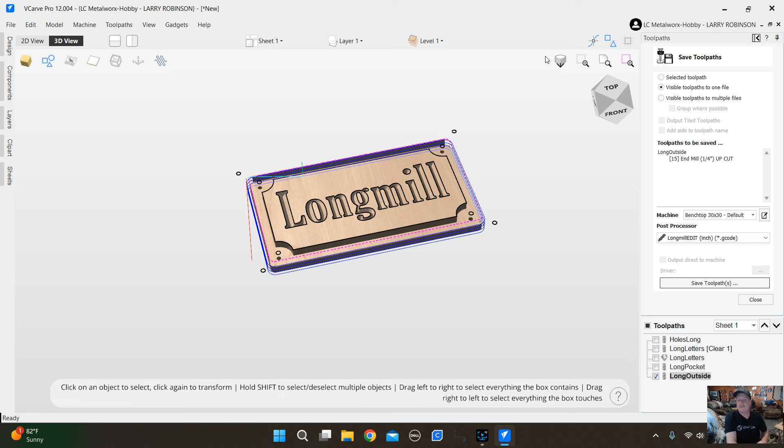All right, appreciate you watching. Hope this is somehow helpful to somebody. Gotta help somebody. I wish someone would have taught me this stuff when I started out, but I just watched every video I could and kind of figured it out. That was on plasma, CNC plasma cutting, but I was doing that.

All right, I'm just gonna save this, and that's how you do it. You go File, Save As, and this saves your CAD program. This is not saving Toolpaths, don't confuse that.

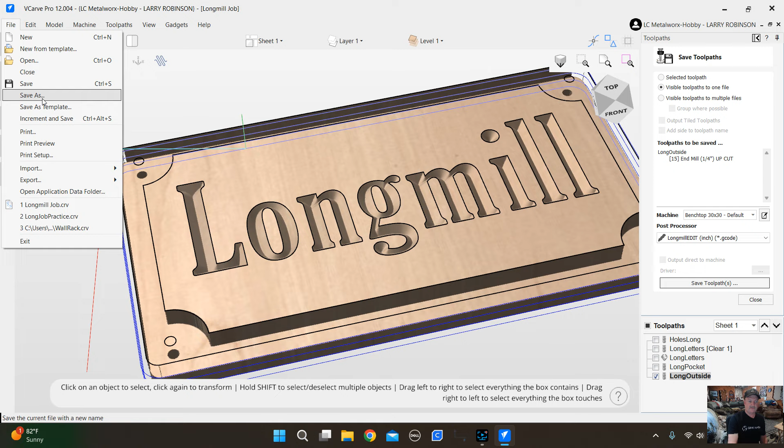Don't confuse the two, because I don't know how many times I've heard somebody say, hey, I saved my Toolpaths, but I can't open up my project and see it anymore. That's because you didn't save it. You go File, Save As, that saves the CAD program. It saves this project we just drew and the Toolpaths, not the G-code, just this part. That's all that saves. I showed you how to save your Toolpaths.

You go over there and that saves the G-code, and you can go down here and look at your G-code. I didn't get into that, I'm already long on this video.